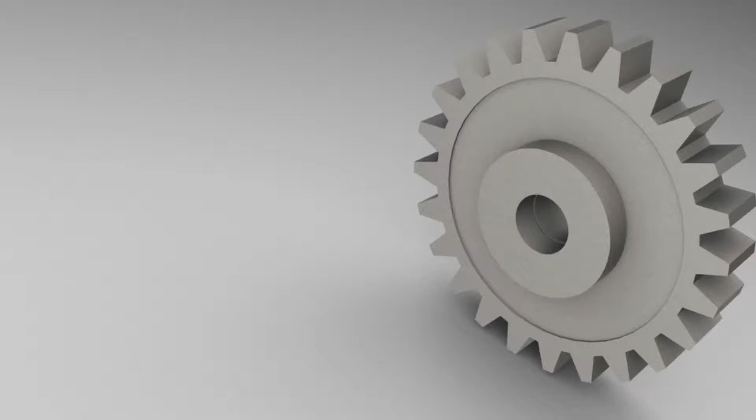Today I'm going to be showing you how to design a basic gear using the CAD program SolidWorks. This tutorial is designed for an entry-level user who has little to no experience using the program, but a basic understanding of the design process. So let's get started.

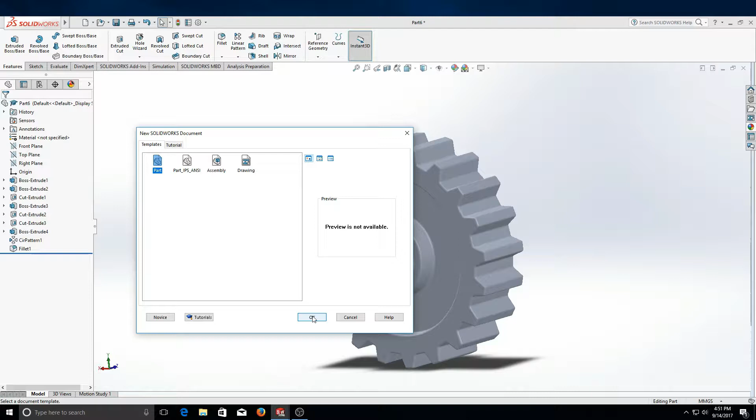So we're going to click File and New in SolidWorks once you open up your program. Click Part, click OK. Now the first thing we're going to do is establish our units for measurement. On the bottom right of your screen, click MMGS. Use MMGS because we're going to be dimensioning this part in millimeters.

Select front plane. Under the sketch bar, click Sketch. Zoom in by scrolling your scroll wheel in or out. Press Circle. From the origin, which is the center of your plane, draw a circle of arbitrary size.

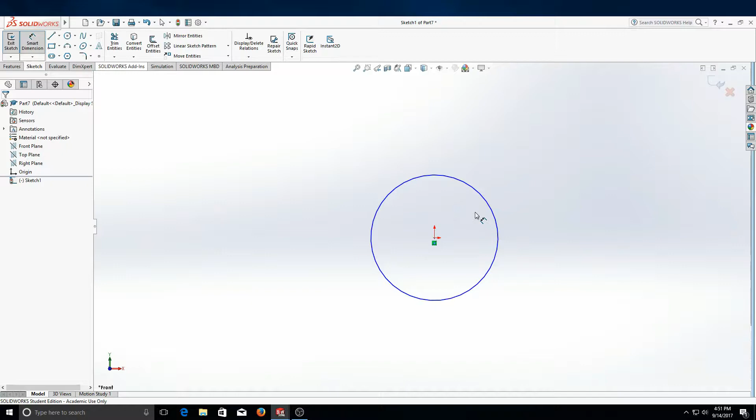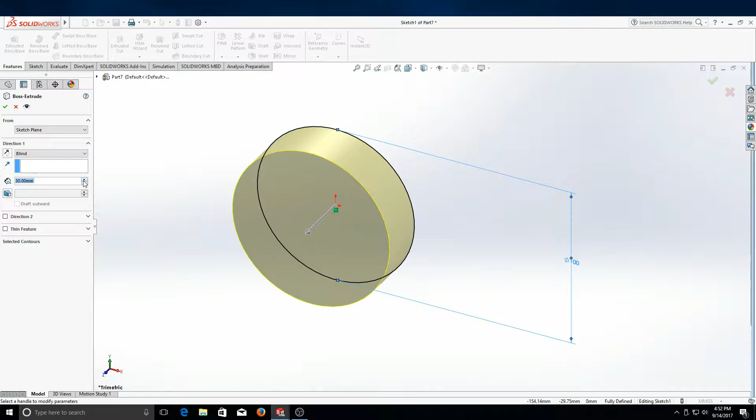Click Smart Dimension. Click the edge of the circle and type in 100. This defaults to millimeters because of the system that we chose, and press Enter. Under the Features tab, click Extruded Boss/Base and extrude this 30 millimeters in the blind direction from the sketch plane.

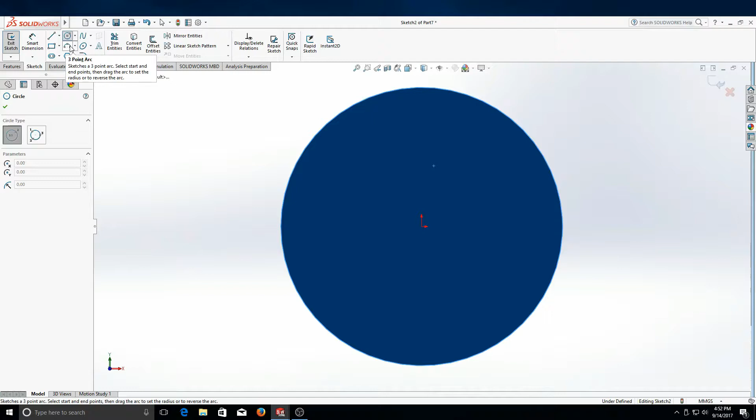Click your front face, press Sketch. Press Ctrl-8 on your keyboard, and this will rotate the piece so that the face you are currently sketching on will be normal to you. Click the Circle tool, draw another circle, and let's do the same thing. Let's dimension this one, except this time we're going to dimension this 30 millimeters.

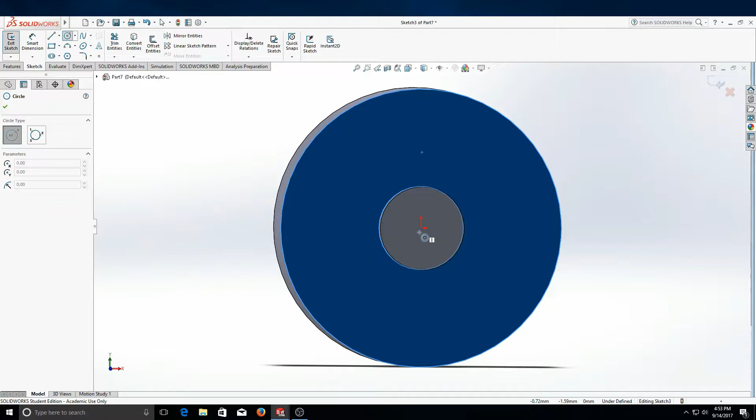Unclick Smart Dimension, go to your Features tab, Extruded Boss/Base from the sketch plane in the blind direction. Let's extrude this 5 millimeters. Click this face here, Sketch, and another circle from the origin. Smart Dimension, and dimension this circle 80 millimeters.

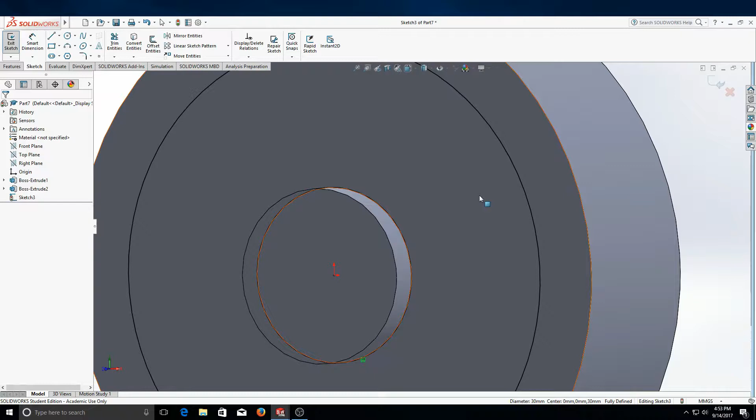Uncheck Smart Dimension. And our next step is going to be click this circle here, press Convert Entities. This will convert a line segment from a previous sketch into your current sketch. Click the Features tab, and this time click Extruded Cut. We want to cut this 5 millimeters from the sketch plane in the blind direction.

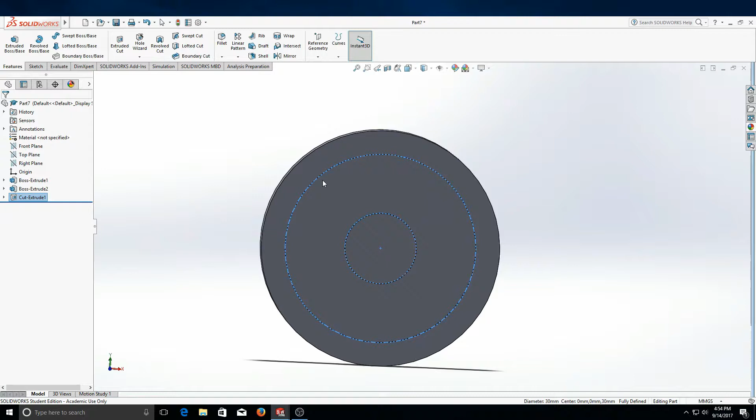So this is the front face of the gear so far. We want to mirror what we've done on this face on the back face, and we're going to do that by converting these lines to the back face. So rotate this piece, select your back face, sketch, and then convert some of these circles. So we're going to use this inside circle again, convert entities.

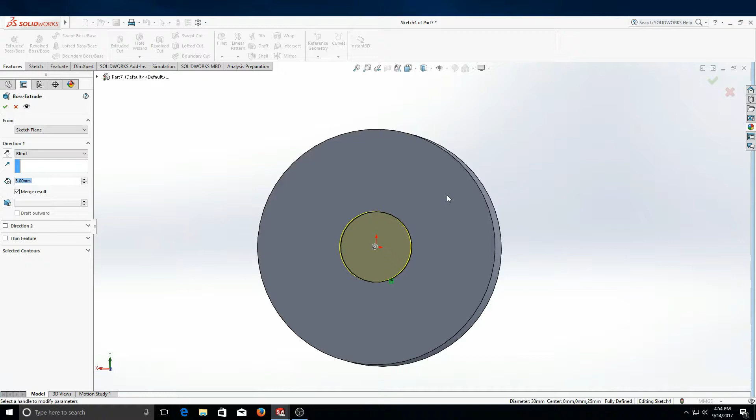Features tab, Extruded Boss/Base, extrude this from the sketch plane in the blind direction, 5 millimeters. Select this face again, sketch, convert the larger inner circle this time. Select it, convert entities. So you also need to select this inner circle and press convert entities.

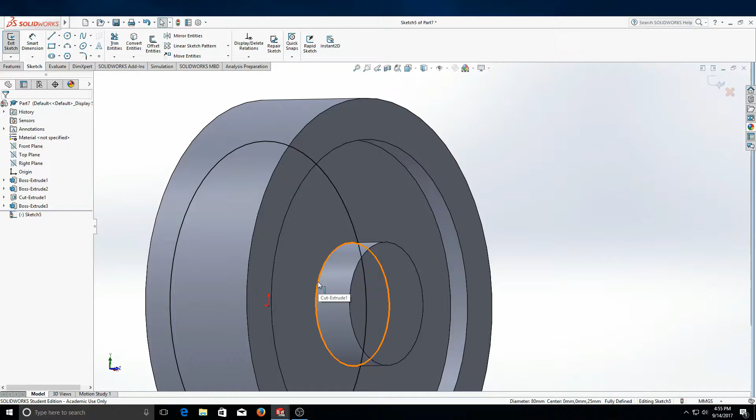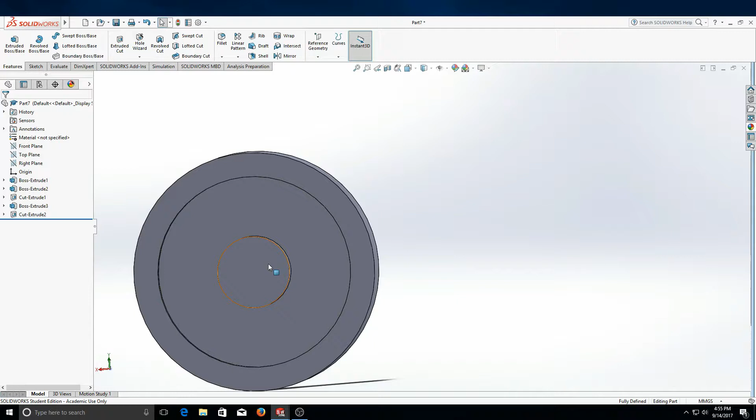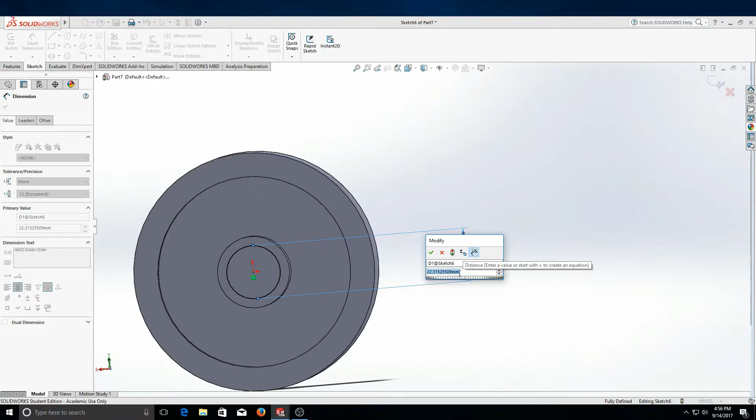Click the Features tab, Extruded Cut, sketch plane, blind direction, 5 millimeters. Select this face, sketch, and we're going to draw one more circle. Under the Smart Dimensions tab, we want this circle to be a diameter of 20 millimeters.

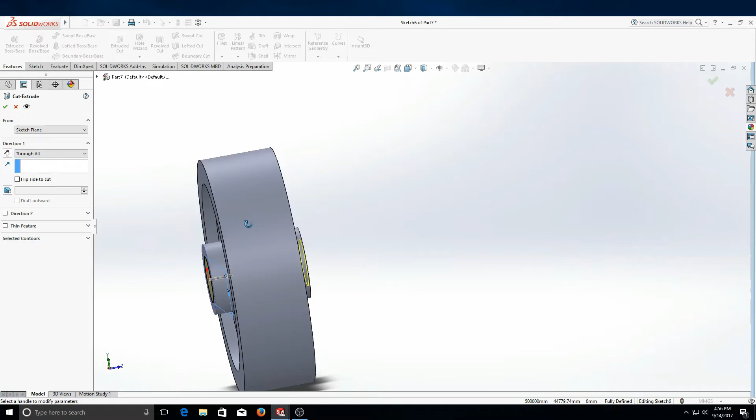Uncheck Smart Dimension, go to the Features tab, Extruded Cut. From the sketch plane in the blind, no, I'm sorry, actually we went Through All for this segment. So put a hole through the entire part where an axle will go through. So this is the gear so far. The next step is to add the teeth to this gear.

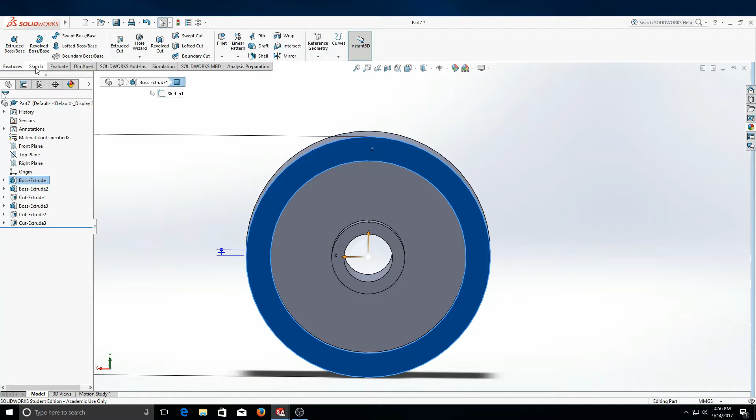Click this face, Sketch tab, Sketch. Zoom in up top. You can also make the screen normal to you. Click the line tool and make an arbitrary shape similar to the one I'm making now. Right click and press select. Now we need to define some relations for these lines.

Press the control key, click this line and this line, and then a little toolbar will come up with relations that you can add to these lines. We want to make these two lines equal. Another relation we want to add is make sure that the endpoints of these lines are coincident with this outer circle, and that shows up in this green box.

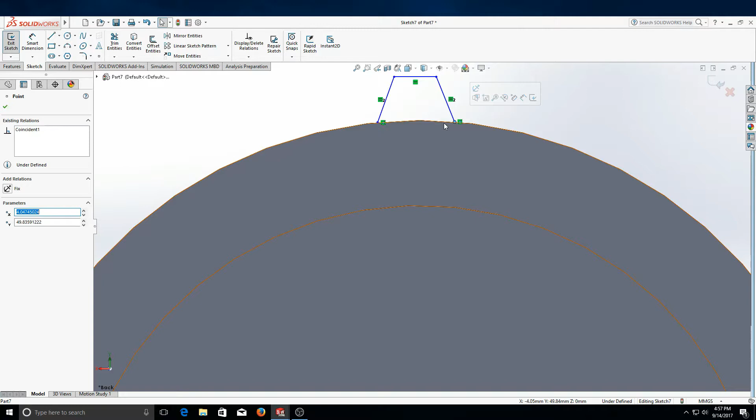If the green box isn't showing up for you, click the end of the line, click the outer circle, and press the Make Coincident button. Do the same thing for this side. Now let's dimension the tooth. Select this line and this line. And this interior angle here, we want to make 110 degrees.

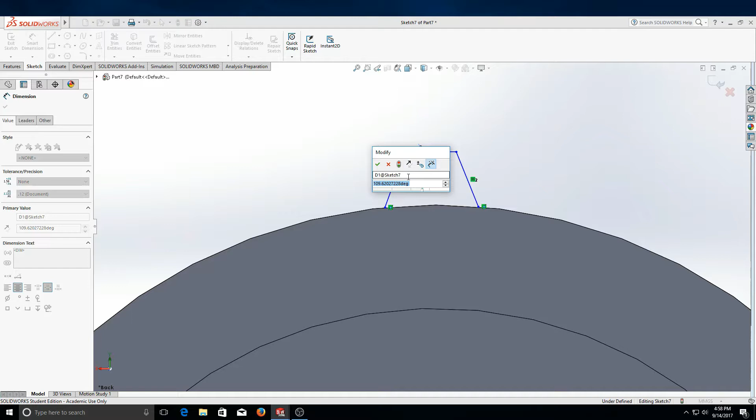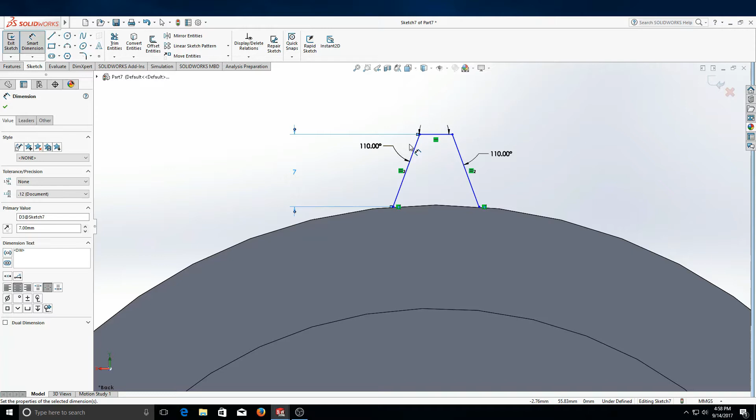And the same thing for this interior angle. Select the top line and the right line. Make this interior angle 110 degrees. The height of this tooth will be 7 millimeters. The width of this tooth will be 5 millimeters from the top. Now the sketch is fully dimensioned, ready to extrude it.

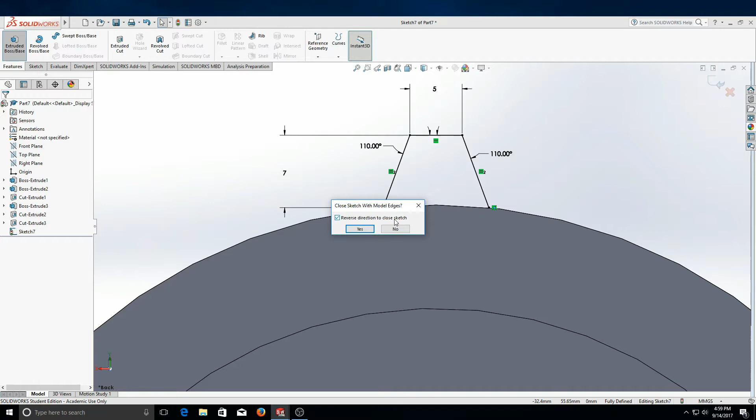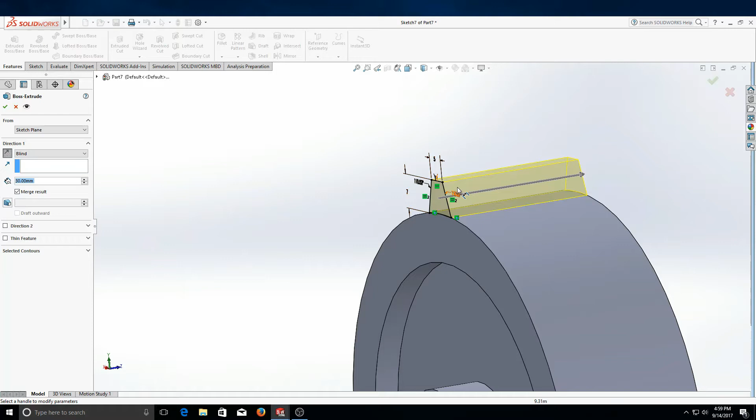Check reverse direction to close sketch and press yes. Now to extrude this tooth from the sketch plane, reverse the direction while still keeping blind as the direction. So press the reverse direction button here. And since this piece has a width of 30 millimeters, we need to extrude this tooth a width of 30 millimeters. Make sure merge result is checked, because if it's not checked, these teeth will be additional pieces and this whole gear will not be one solid piece.

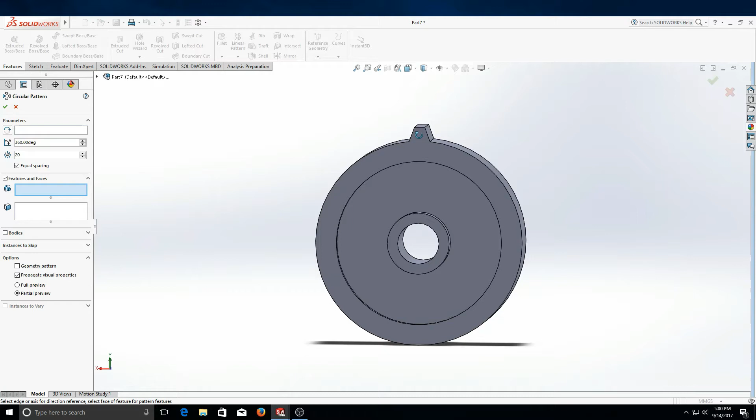The next thing we need to do is make teeth around the whole gear. And rather than doing that by hand, which would be tedious and tiresome, we're going to use the Linear Pattern tool under the Features tab. Click Linear Pattern, press Circular Pattern, click a segment that says Boss Extrude 4,

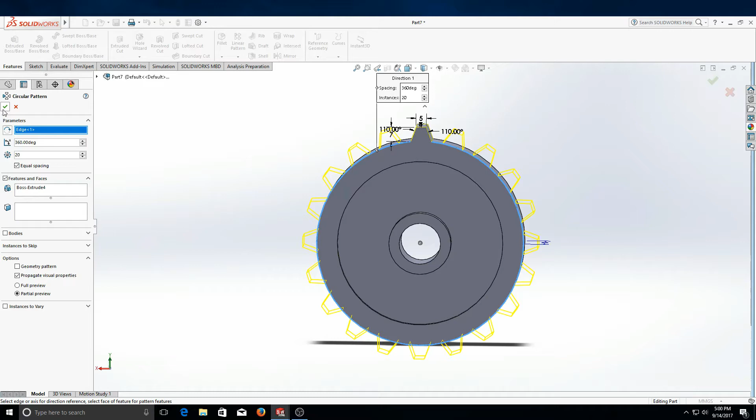and then click the Parameters box, and click the outermost circle as your parameter, which is edge 1. We want to make 20 teeth in equal spacing. And once you have this parameter set, click OK. That's the gear so far.

The last thing we want to do is get rid of any sharp edges and corners, and we'll do that with the Fillet tool. So under the Features tab, click Fillet. The radius of the fillet, we're going to use 1 millimeter. And then select every edge to fillet.

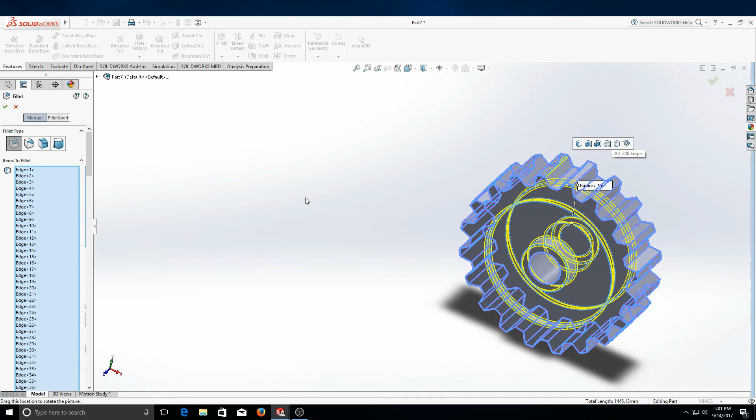Then when you get to the teeth, click an edge on the tooth, and then in the toolbar, press all 240 edges. Click OK. So that's the gear. I'll show you it from the isometric view.

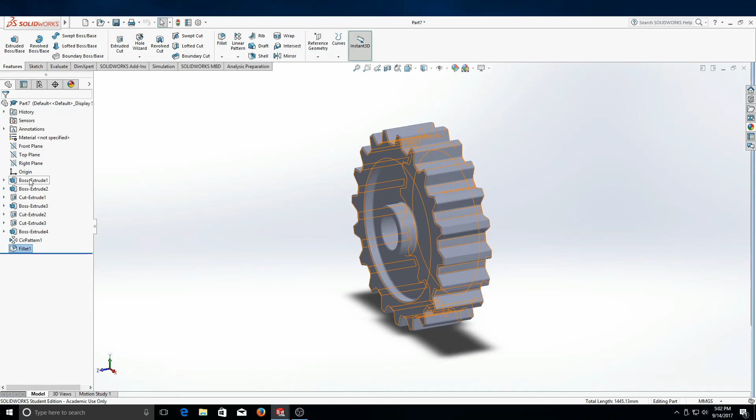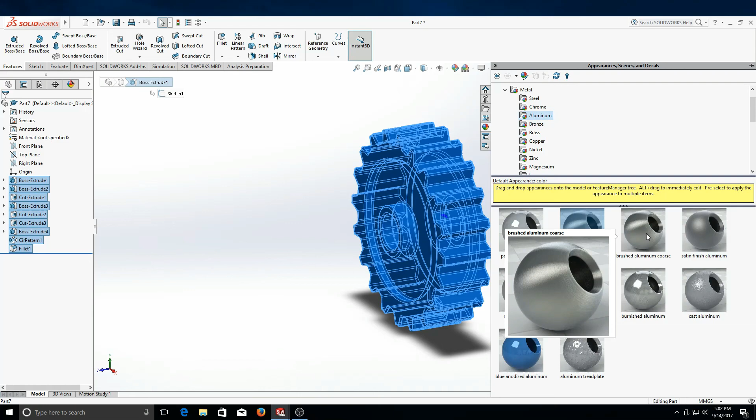The last thing that we're going to do is assign material to this. So come over to your sketch panel and highlight every feature that you've added to this part so far. Go to the right side of your screen under the Appearances, Scenes, and Decals tab. Click it. Choose Metal, Aluminum, and then let's choose Satin Finish Aluminum for this piece.

And there you have it. That's how you design a basic gear using SolidWorks.